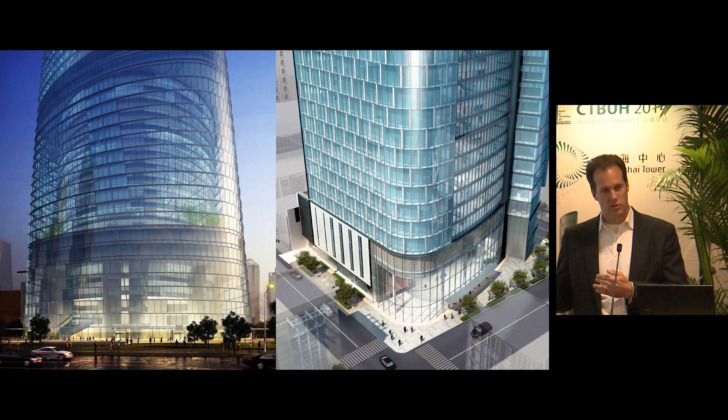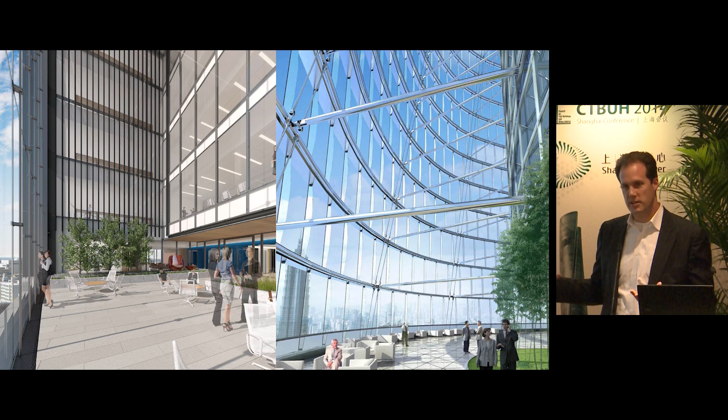So the question becomes, how do we infuse urban habitat into tall buildings? And our answer with these 2 projects is that we are able to use the double facade as a key design strategy that makes it possible to build urban habitat into tall buildings. So you see here side-by-side comparisons where both of these towers incorporate sky gardens as well as a number of other features within a double facade.

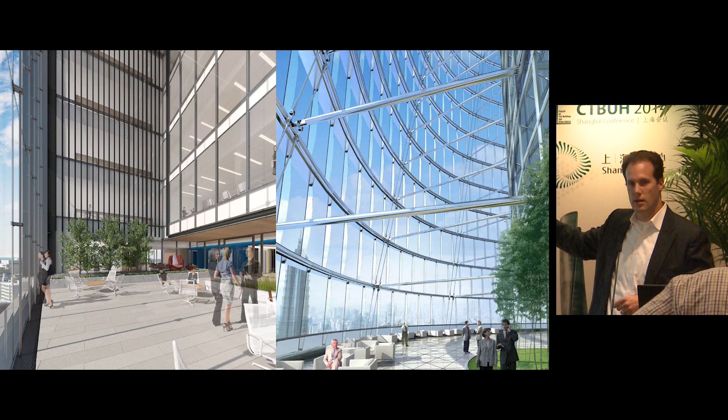And I'll talk about each tower. First I'll talk about PNC, and then I'll end on Shanghai Tower. And I'd like you to see the common themes that the projects share, which is the double facade creates urban habitat at a variety of scales.

So the question of ROI, we called the talk ROI. And Mr. Gu talked about ROI, and he gave some specific metrics this morning about ROI. So the normal equation for ROI is quite simple. The question is, how do we add in human experience into this equation in a plausible way?

So if we're doing a project for a developer, they would look at ROI of human experience as something that's very hard to measure and pay more money for a building up front in order to generate returns on that investment in a spec office development, right? So what we think about is the number one expense for most companies is human capital. So changing productivity of human capital by a very small margin has an enormous leveraged return on the performance of a real estate asset and the company, therefore.

And there's a body of work that talks about the increase on typing output or the reduction in errors when you simply measure in a clerical setting. Somebody who's just doing typing and data entry, you reduce the number of variables, and it's easier to measure the improvements that you get with sustainability and features that double facades offer. So there's this body of work out there, and the purpose of today's talk is not to go into this in a lot of detail, but to make you aware that it is out there, and this was part of the basis of our work on both of these projects.

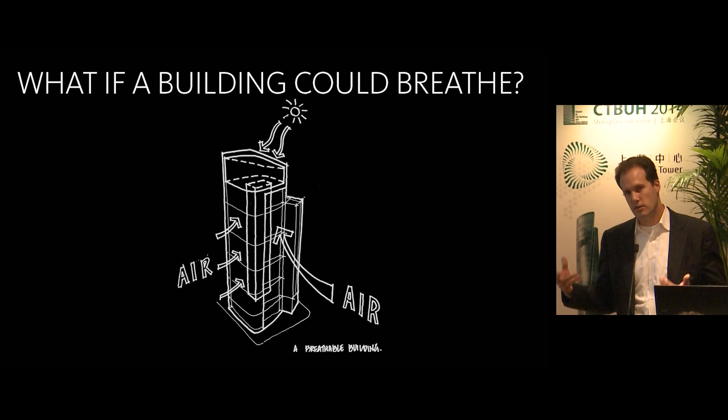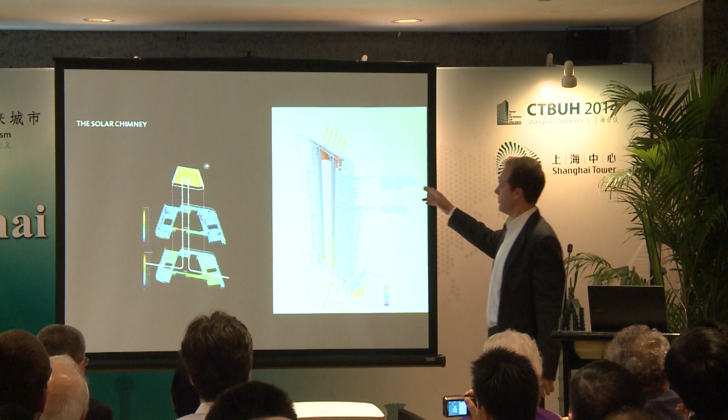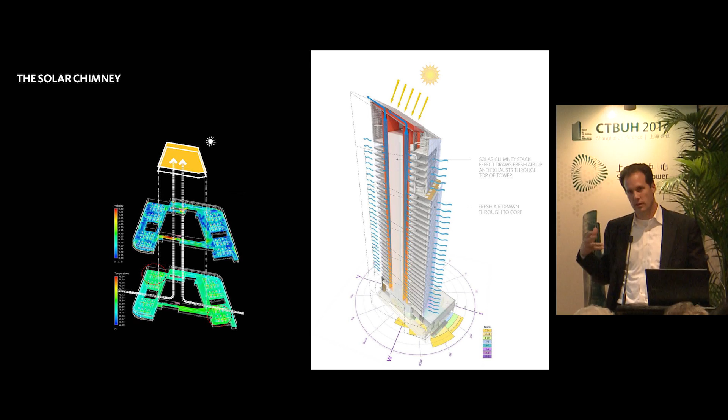In the case of PNC Tower, we started the project by asking ourselves these types of questions, and they led to this seminal question for the project, which is, what if a building could breathe? So the way that we make this building breathe is we create a solar chimney where heat from the sun heats up air at the top, and that creates a return air draw through a chimney up in the middle of the tower. This draws fresh air in through the double facade and creates a naturally ventilated office area.

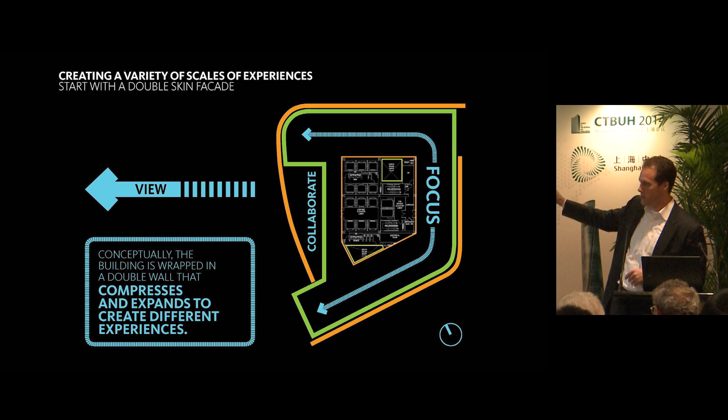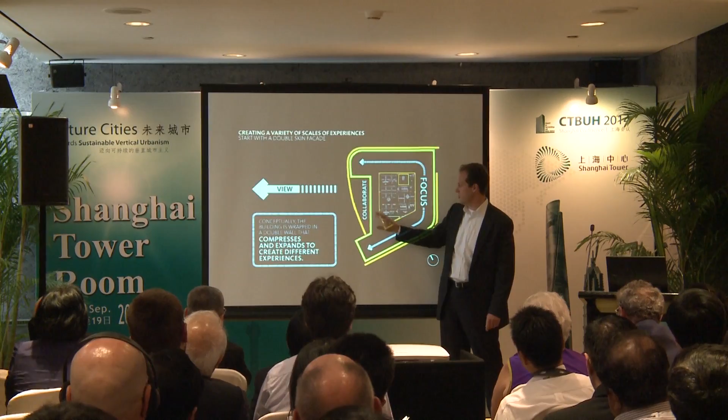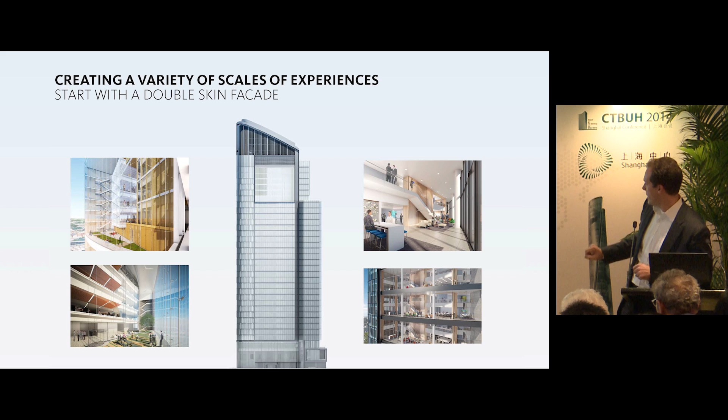So the entire building is wrapped in a double facade that compresses and expands into different sizes to create a variety of types of experiences at different scales. So you can see where we create focused office space as well as collaboration space that occurs in the layer of the double facade, similar to Shanghai Tower. And this gives you some images that show you those ideas of the different types of spaces that you encounter within the tower at different scales, all between the double facades. So this is the idea of the urban habitat brought into the high-rise building. And you don't have to go outside to get a breath of fresh air. You can do it within the building.

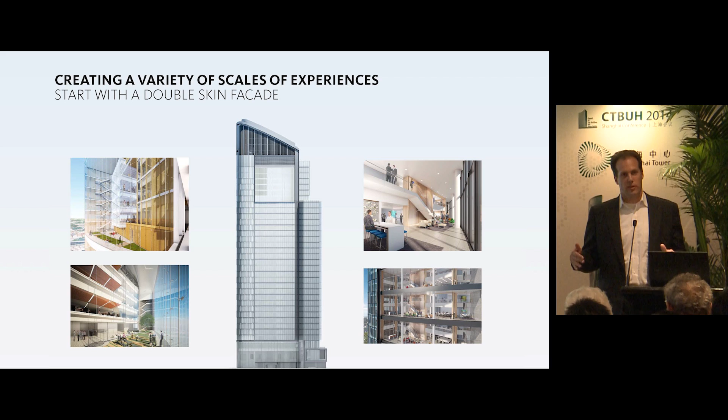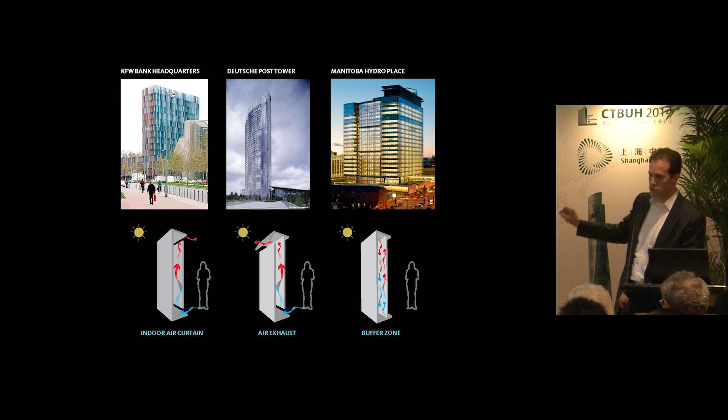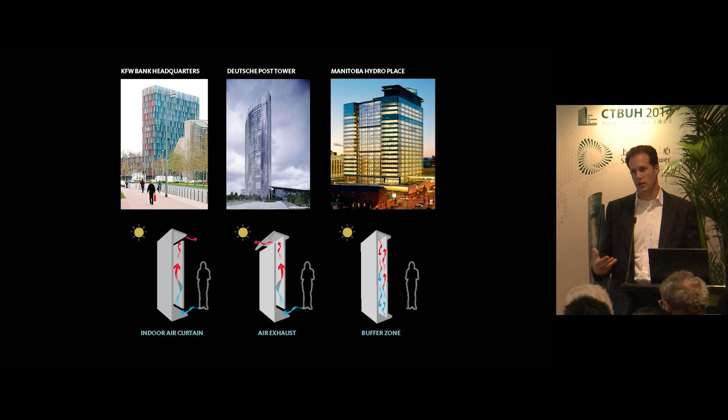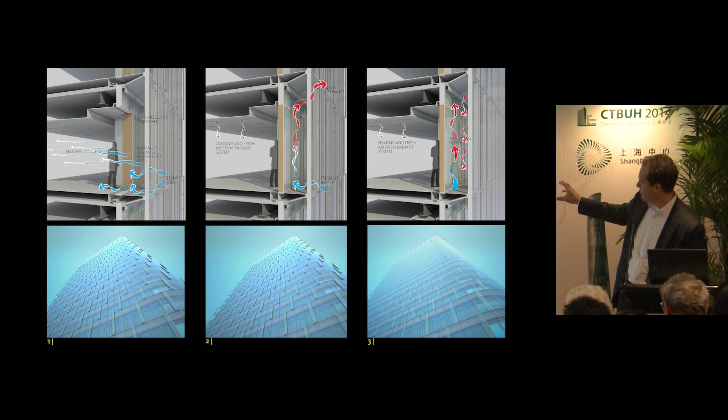We looked at a number of precedents for double-skinned facades as we were designing this project. And in a lot of those precedents, the double-skinned facade is a technology that's applied to the outside of the building to make it more efficient. And the users are not aware of how that technology is working. So even though the building is more efficient because of the double facade, it hasn't necessarily benefited the human experience. So in the case of this double facade, it works in a number of different conditions over the course of the year. And in natural ventilation, air comes in across the floor plate, and you feel natural ventilation as a cooling for the tower.

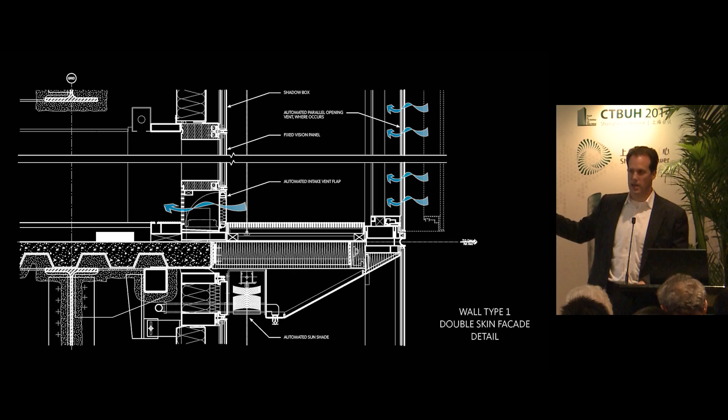This shows you that even when the user doesn't open the facade, it still works on its own. The entire inner facade here is made out of wood, and the outer facade is made out of laminated low iron glass. So it's a very similar makeup to Shanghai Tower. Shanghai Tower also has the laminated low iron glass and then insulated glass inside. So PNC Tower is working on a similar concept.

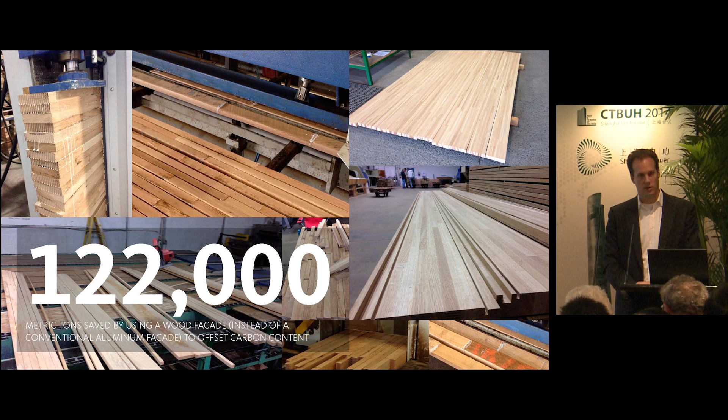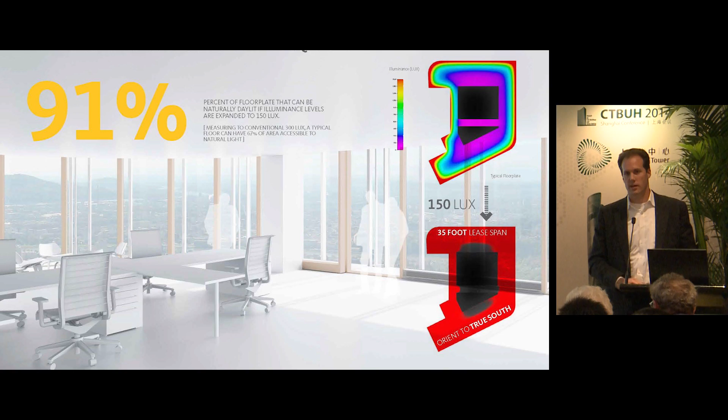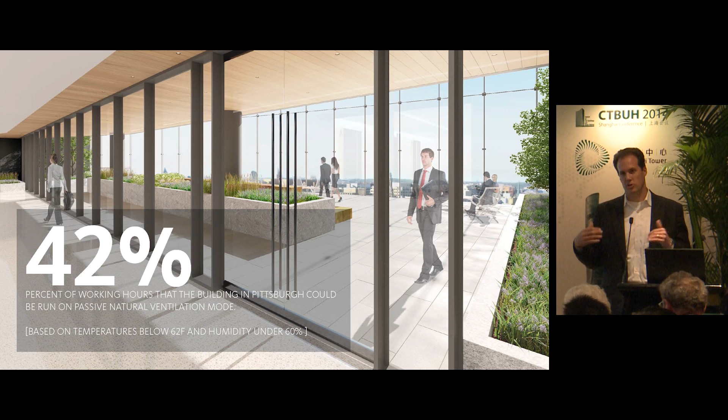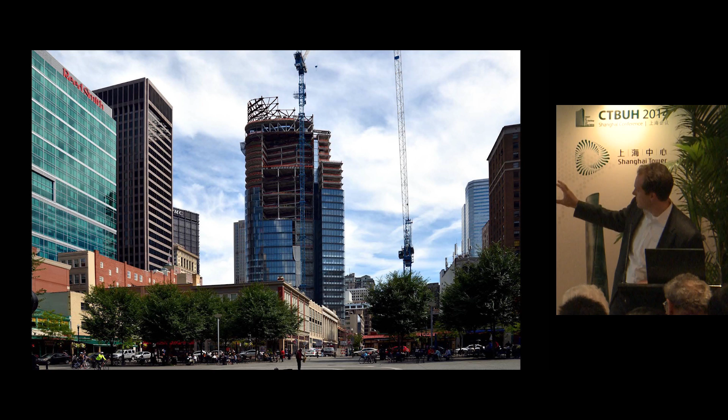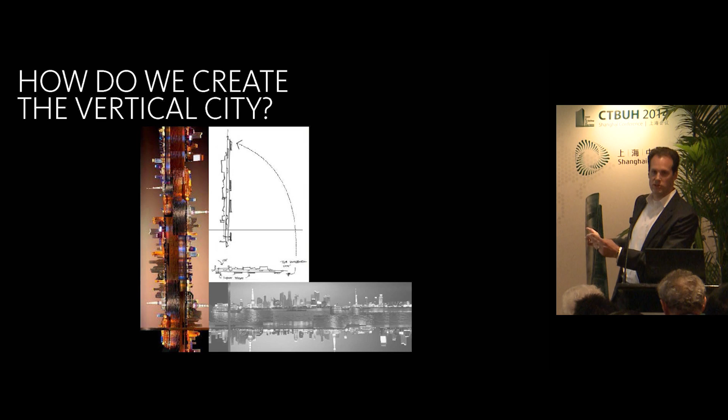Interesting that Shanghai Tower and PNC Tower both finish at about the same time. But because Shanghai Tower is so much bigger, it had a head start of several years. So now I would like to talk about Shanghai Tower as China's tallest and greenest high-rise. So similar to PNC, the question was, how do we redesign the chassis of the super tall building to create a great human experience? As you heard Mr. Gu in the morning session, Shanghai Tower is similar to the dimension of the Bund, tilted up vertically.

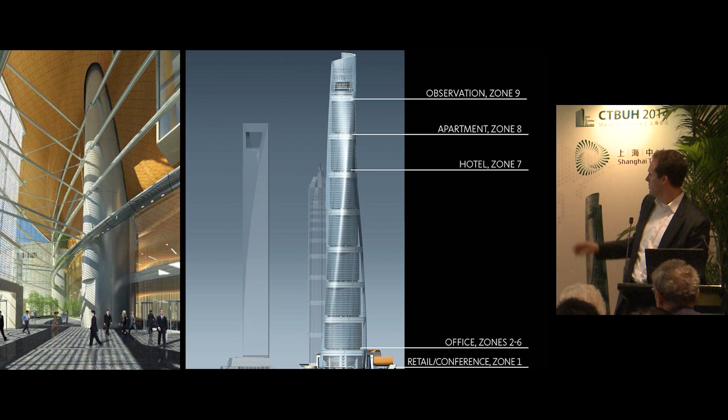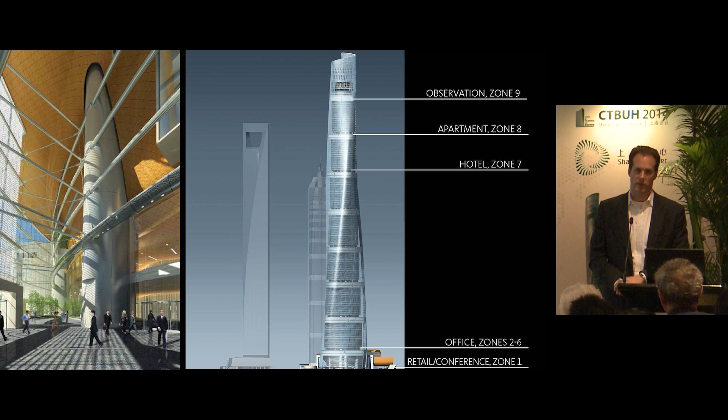The other important concept for Shanghai Tower was to create an icon of modern China, of a nation that's filled with a future of limitless possibility, as our client has said. So the vertical city is, as all of you are probably quite familiar now, and the project is right across the street. There's a tour this Friday. The vertical city is built into these 9 zones. At the bottom of every zone are 3 sky gardens. The very top zone is the observation level. So as Mr. Gu said this morning, we end up with 21 sky gardens arranged vertically throughout the tower. That's the urban habitat within the tower.

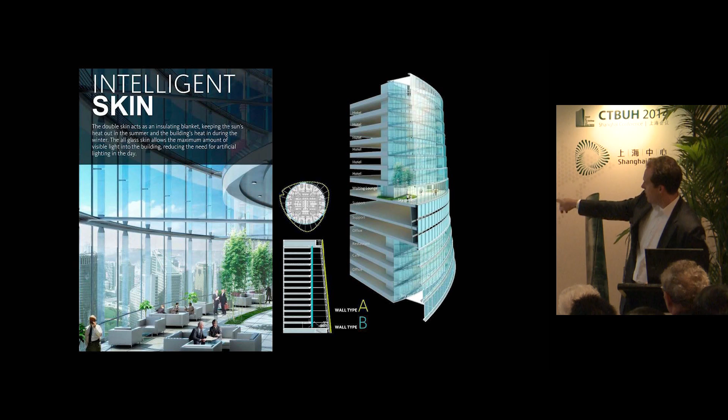So one of the key ideas here, as I said, is the double facade. We call it the intelligent skin for Shanghai Tower. So the outer facade is a triangle, and the inner facade is a circle in plan. So what this achieves is a very efficient construction where the inner facade is stacked vertically and those floor plates repeat themselves, and it makes the construction very efficient. And then the form, the twisting shape, is accomplished entirely with the outer wall. So that's what creates this iconic form without making every floor plate different. And then the space that's left between those is the urban habitat of these sky gardens.

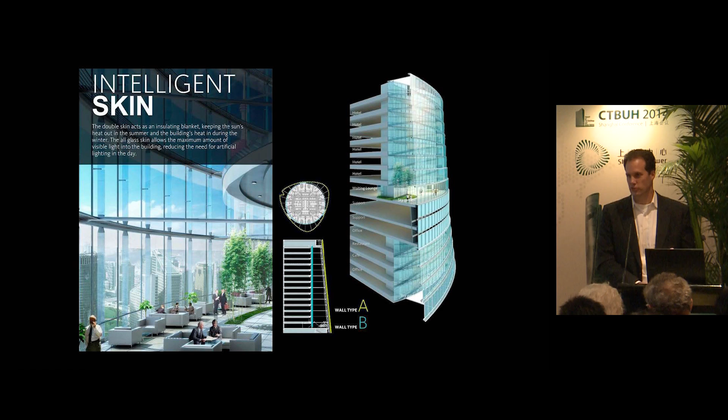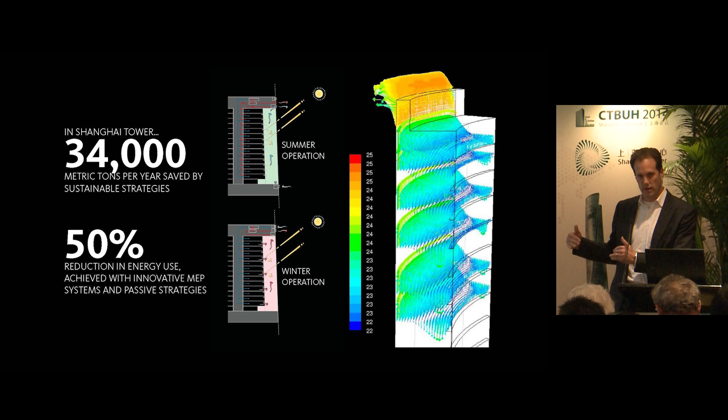So why do we call it the intelligent skin? What makes it intelligent? The skin itself is passive, it's not active. So its intelligence is derived from the way that it holds heat and creates an insulating blanket around the building in the wintertime. And in the summer operation, it sheds that heat back out. So we avoid that heat from loading the interior office space. So this reduced the metric tons of carbon that the building consumes. It saves energy use. So it has a clear economic ROI, a clear sustainability ROI, and it creates an iconic form and a great user experience.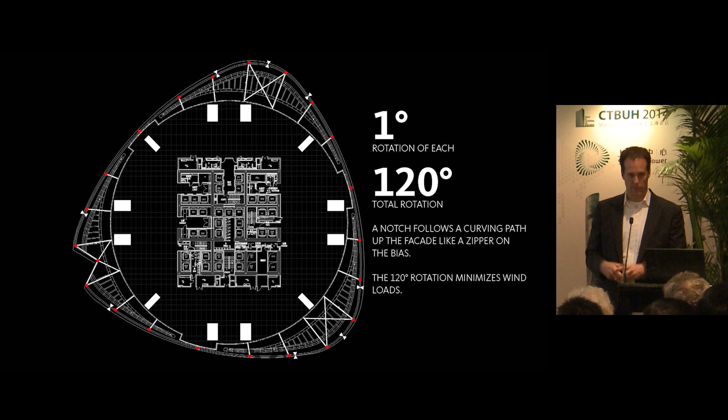So this gives you a little bit more detail of the plan. You can see the core in the center here, surrounded by the super column structure, the inner facade, and then the triangular outer facade. And the outer facade is what is rotating. The inner facade is straight up and down, and that makes it very efficient and economical to build the inner facade and core structure. Just the outer facade creates this form.

So Shanghai Tower's outer facade has approximately 30,000 curtain wall panels. The most that any one of them repeats is 3 times. So you can say in round numbers there are approximately 10,000 unique curtain wall panels. So this is very complex, but we make this very simple with this type of detail where you see the steel outrigger shown here in the photograph, the girt going back, and then the sag rods. So that structure is supporting the curtain wall.

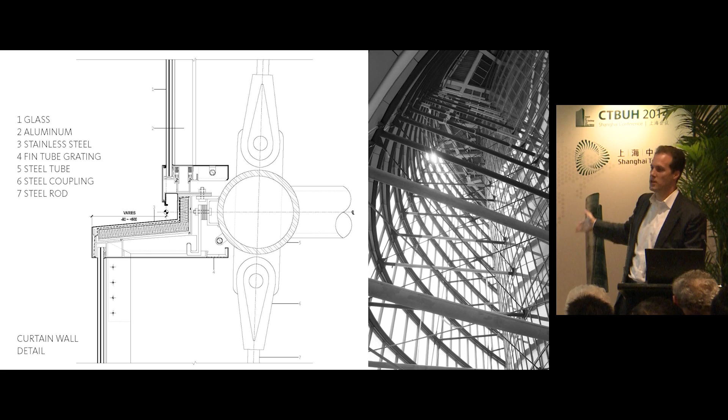And effectively, the horizontal dimension of this shelf is what changes as you go around the building and up floor by floor. So if you go across the street after the conference, you can look up and see this aluminum dimension here is what really records every floor of the tower. So we resolve the complexity of this facade and this detail in a very simple way, and it creates this very unique experience. As Anthony mentioned this morning, there are very few super tall buildings that create a spatial experience within them. So Shanghai Tower is unique in this way, and the double facade of this tower is what creates that experience.

These are some construction progress photographs. There are also quite a few on the wall around us. There's a video playing outside, and the tower is across the street. There's a tour on Friday, so there's plenty of opportunities for everyone to see this.

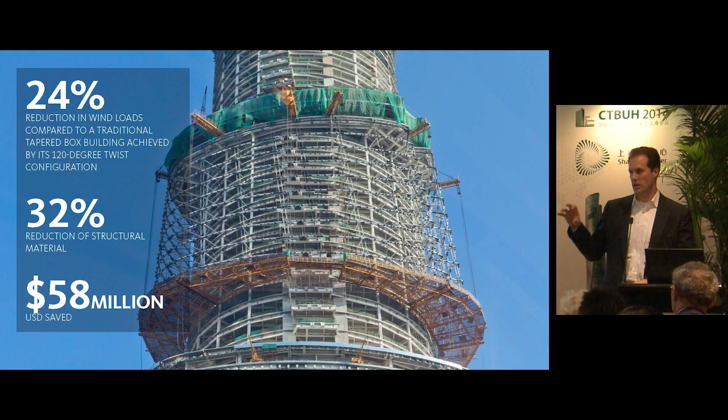One of the other interesting things about this twisting shape is it's not just an iconic form, but it also helps to reduce the wind load. So this is another way to measure the ROI of the tower.

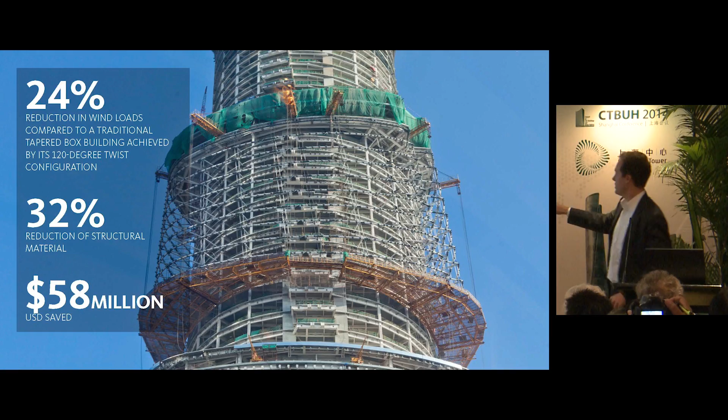Even from the outside, this is recognizable. On a clear day, even from as far away as Puxi, you can see through this layer of space, especially in the morning and in the evening when the sun is behind or at a lower angle. So the double facade is something that's experienced not just from within the tower, but also from outside the tower.

Right now the glass is very dirty. They've cleaned the first lowest zone across the street, so when you see the lower zone right now, you can get a better sense of how transparent the glass really is. The upper levels have a little bit of dirt from construction on them, so it's harder to see through. Just keep that in mind when you go out and look at it.

So the double facade makes it possible to have a very transparent building, much more than we could do with energy codes if we did not have a double facade.